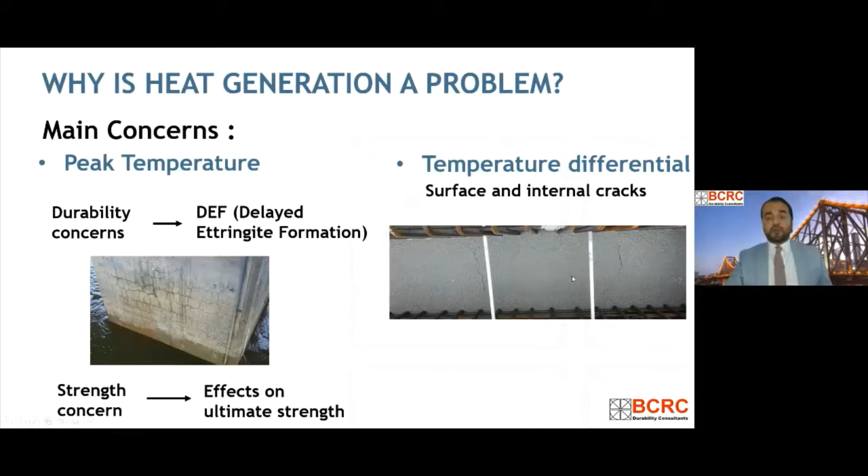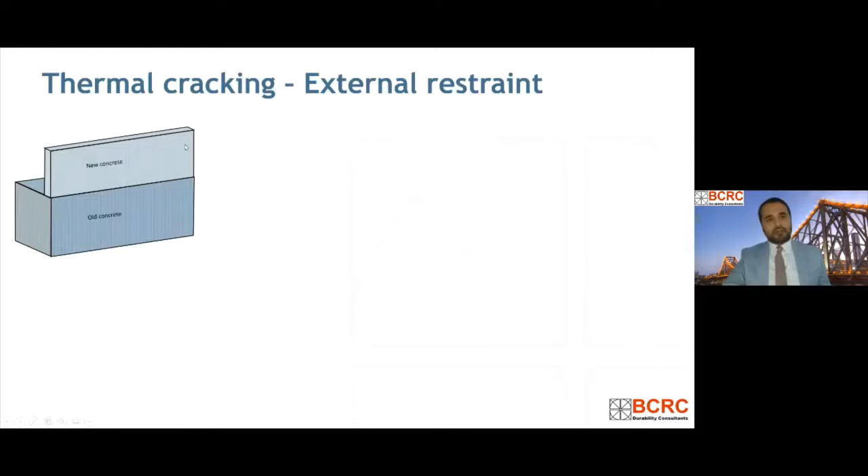Now all these thermal contractions and shrinkage are restrained by this old concrete, right? And the degree of restraint will depend on the size of both elements, and the type of concrete that we're using, the elastic moduli. So it develops tensile stresses in the new concrete, right? Our compressive stresses gradually change to tensile stresses, and as soon as they exceed the limited tensile strength capacity at early age, the cracking occurs. So this is the whole mechanism behind the external restraint cracking.

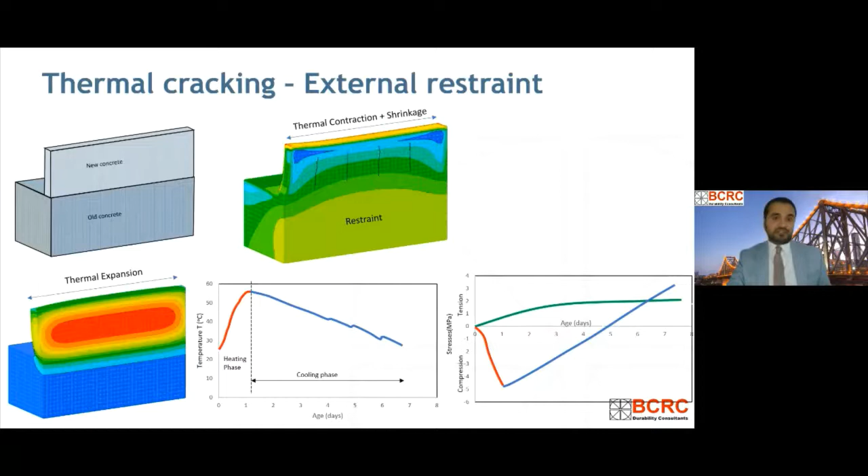Now in mass concrete elements, the main type of cracking that we observe is due to internal restraint, right? So what is an internal restraint? Internal restraint occurs due to temperature differential, as I said, because your inner core is too hot and the heat is dissipating from the surface, so you always get a gradient, right? So no matter if the concrete is insulated, you still have a gradient, and even if you remove the formwork, you will get a much steeper gradient at that time, right?

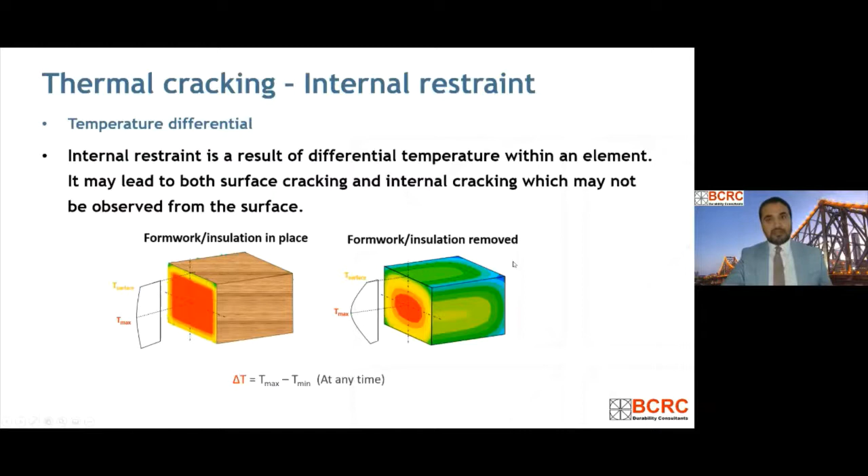So our temperature differential is basically the maximum temperature minus the minimum temperature at any stage during this process, right? It's not just when the formwork is in place. It can happen once you remove the formwork, so that temperature differential should be considered at any stage during this whole process, right? Now we know what the temperature differential is, so we can see how this internal restraint or temperature differential causes the cracking, right?

Whereas in the cooling stage, the core starts to cool down more rapidly compared to the surface, because the surface has already lost a lot of heat, right? So in this case, the tensile stresses start to develop inside the core, and then you have a risk of internal cracking as well, right? So at this stage, surface cracks may open, and also you can get some internal cracking which may not be visible from the surface. So this is what happens with the internal restraint.

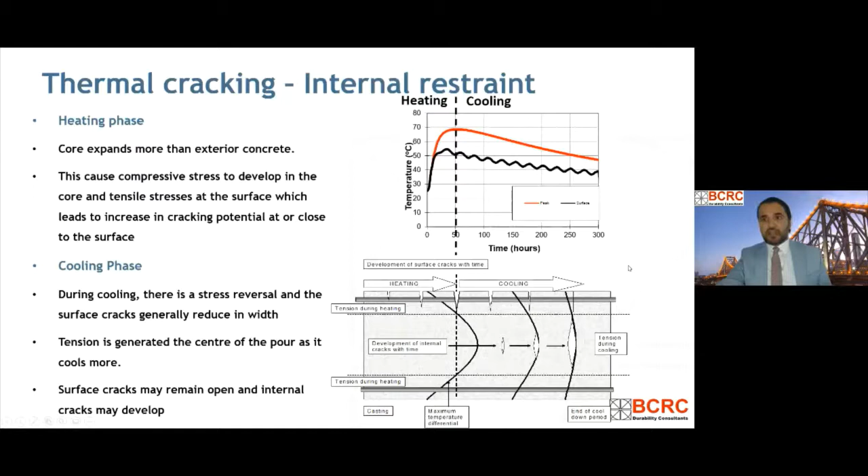Now to evaluate the risk of cracking due to internal restraint, we need to calculate the thermal strains, right? Thermal strain is normally calculated with a simple equation. You just multiply the coefficient of thermal expansion of concrete with the temperature differential you're getting. So it depends on two factors. You can see from the equation, the higher the coefficient of thermal expansion and the higher the temperature differential, the higher the cracking risk.

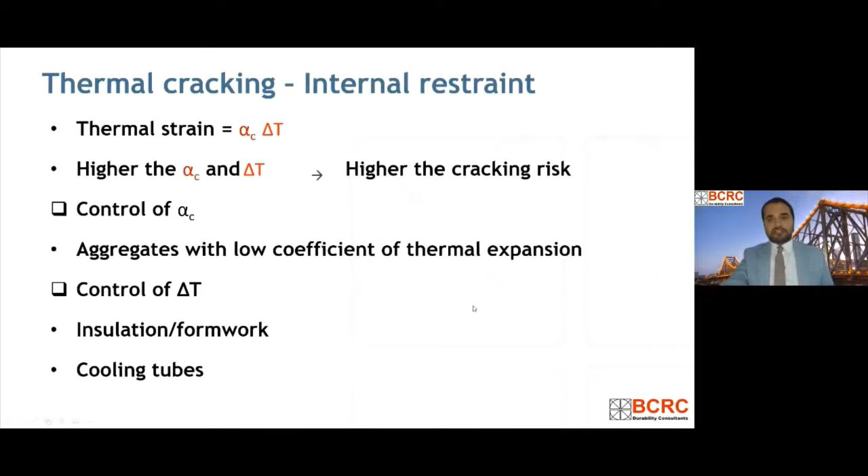So to eliminate the risk of cracking, we need to lower these two factors, right? We need to select the right type of aggregates which have a lower coefficient of thermal expansion, so we can get a lower coefficient of thermal expansion for the concrete. This is one way, and the other thing is we need to control the temperature differentials. Now, how to control the temperature differentials? We can do it in two ways. We can use insulation or formwork, or we can use cooling tubes, right? So let's have a look at this example on controlling the temperature differential by these two different methods.

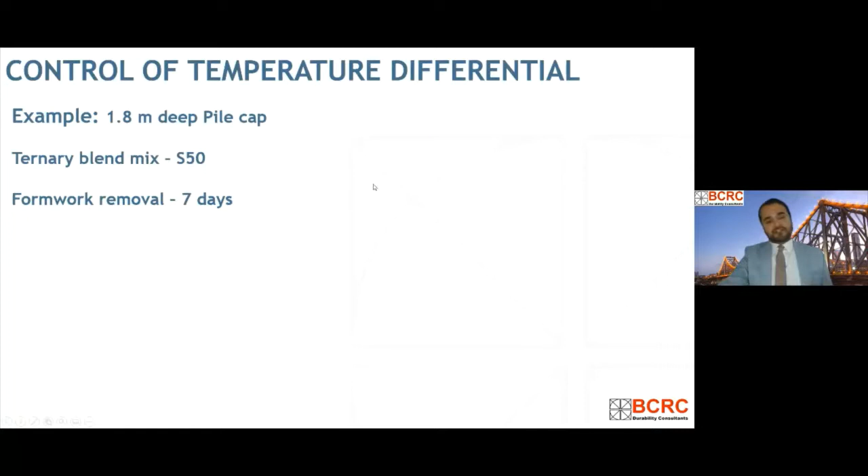But as soon as you remove the formwork, there is an abrupt change in the temperature differential. This is called thermal shock. So in this particular example, the temperature differential that we are looking at is much higher than the normally allowable limits, which are between 20 to 25 degrees. But in this case, we're looking at a temperature differential of 48 degrees, which means there is a serious risk of cracking, right?

Now to avoid that, because we're looking at the first case, we're using formwork and insulation to control this temperature. So we need to extend the period where the formwork or insulation are in place, right? We can extend that period and we can bring that temperature differential down within the allowable limit. In this particular case, we need to keep the formwork and insulation in place for 24 days, right? If you keep that in place for 24 days, you can get the temperature differential within the allowable limit, which is 25 degrees, right?

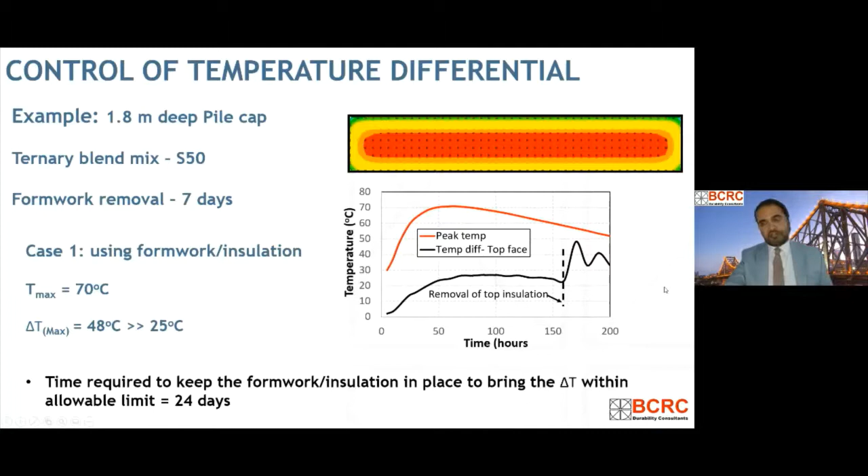So you can see that this technique takes a much longer time to control the temperature differential within the allowable limits. The much quicker technique is using the cooling tubes. Again, the same example, but this time we're going to model it using the cooling pipes, right?

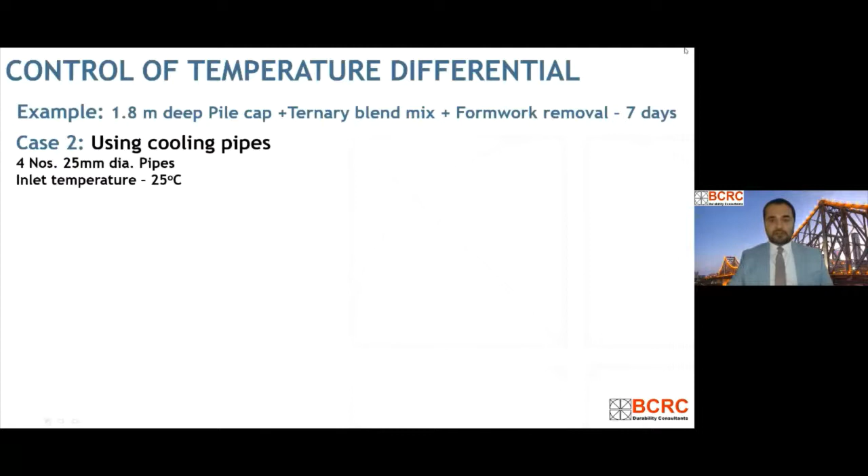So what we are doing, we're introducing 4 cooling pipes, 25 millimeter diameter, with an inlet temperature of 25 degrees, right? So this is the modeling outcome. You can see this is the cooling pipe going through the pilecap. This is the longitudinal section, and you have 4 of these running along the width.

So what happens then? Now we can see that we have significantly reduced the peak temperature, right? From 70 degrees in the previous example, we have reduced it to 60 degrees, right? Not only that, we have also reduced the temperature differential, right? So this is the formwork insulation removal time, which is 7 days that we considered in the previous example. But this time we're only looking at a temperature differential of 24 degrees, right? And a peak temperature of 60 degrees.

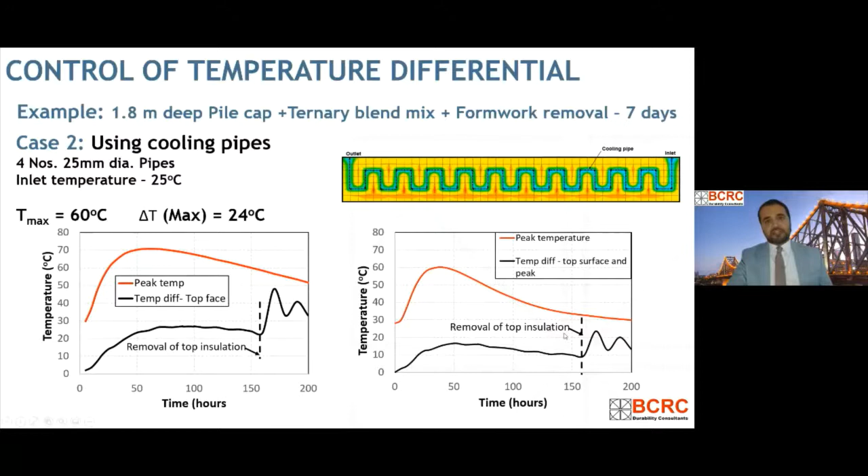So just to make a comparison with the previous example where we have done modeling without any cooling tubes, you can see that we have not only reduced the peak temperature, but we have also increased the rate of cooling in the cooling phase, which is very helpful in keeping the temperature differential within the allowable limits, right? Okay, so next let's move on to thermal modeling.

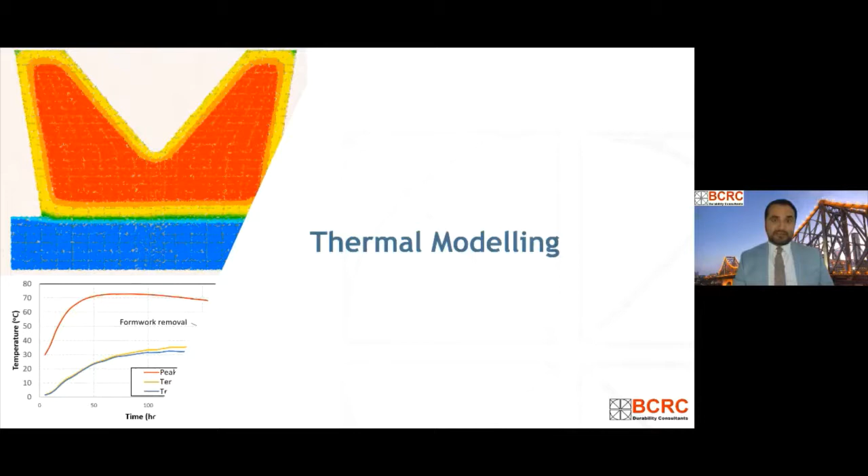Now thermal modeling is very important, because you need to predict the temperatures, you need to predict peak temperature, you need to predict the temperature differential to assess the risk of cracking, and it is very important to do it accurately, because the errors made at this stage can have significant consequences, right? So the first thing to know about thermal modeling is you need to basically know the adiabatic response of the concrete, right?

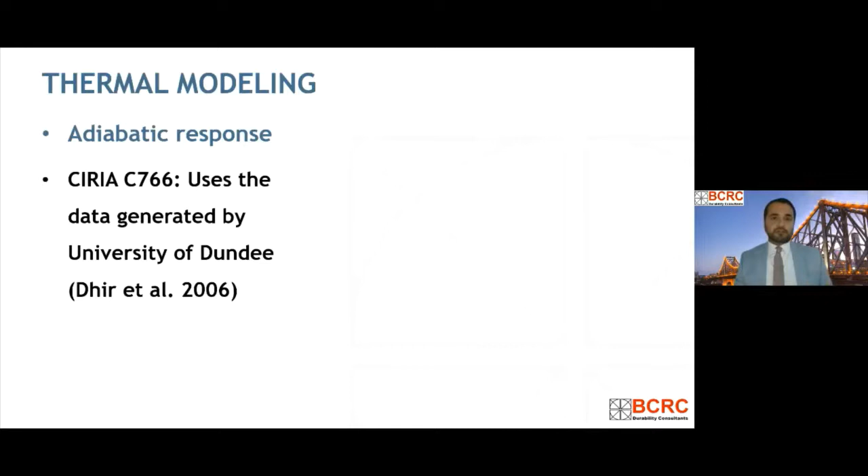So adiabatic response can be estimated using CIRIA C766 spreadsheets, right? So CIRIA C660 or C766, which is its update. They use the data which was generated at University of Dundee in 2006, right? So they have a set of data for each supplementary cementitious material and its type of cement. And then you can use that data to basically predict the adiabatic response. This is how a CIRIA C766 spreadsheet looks like.

So you put your binder content, whatever the binder content you have in your concrete mix. You put the binder type, whether it's 100% GP cement, whether it has some fly ash in it or it has slag in it. You put that binder type in it, and then you put the addition, like what percentage you're putting in it. And you can easily predict this graph, right, which is the adiabatic response.

But the issue is that it has certain limitations, right? This spreadsheet is based on the experiments which were performed in UK, and Australian cements are much different from the European cements, and the behavior can be different too, so you can estimate a wrong temperature. The other limitation that it has is that you can't use it for a triple blend concrete, right? You can see this option here, the binder type. You can only put one type, like either you can put fly ash in it or you can put slag.

But if you have a ternary blend where you have fly ash and slag together, you cannot use this spreadsheet unless you are very experienced and you know how to handle the situation, and you have seen the adiabatic response of these mixes before. You cannot straight away use this spreadsheet, right? So this is the main limitation.

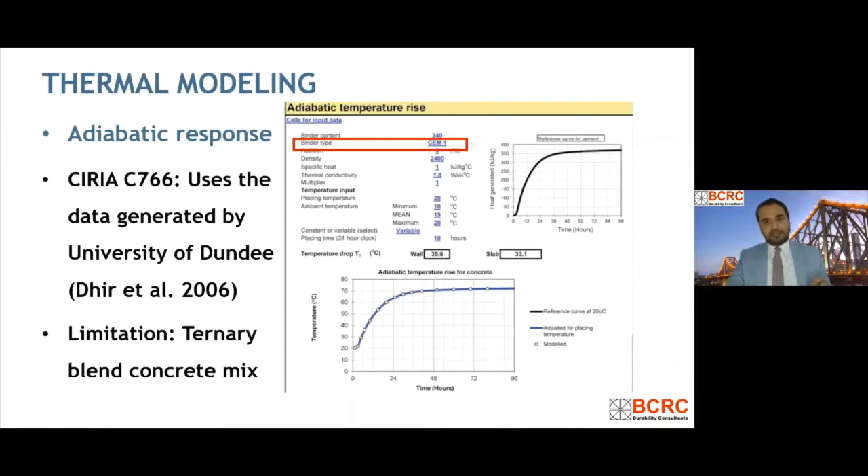So that's why the more accurate way to get the adiabatic response of a concrete mix is to perform a hot box trial, right? At BCRC we developed a two-probe method, which is given in CIA Z7/07. So it's a two-probe method. This is how the geometry of a hot box looks like. It's a 1 cubic meter concrete you basically need to pour. And the data that we get from this hot box test is very accurate.

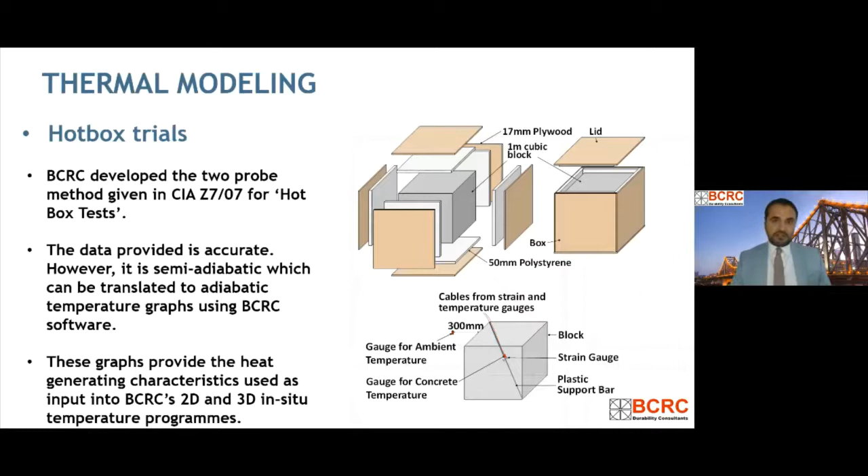However, it is a semi-adiabatic test, right? You have to keep that in mind. You cannot use that data simply in your modeling because this is a semi-adiabatic test, and you have to change this data to fully adiabatic, and we can do that at BCRC using our in-house software, which changes the semi-adiabatic data to adiabatic. And then once you get that adiabatic curve, you can generate the heat generating characteristics of the concrete, which can then be used in 2D or 3D modeling to predict the in-situ temperatures, right?

Now, for in-situ temperatures, there are two different techniques, right? The first one is the simplest one, using CIRIA C660 or CIRIA C766 spreadsheets. Everyone has got access to CIRIA C766 spreadsheets. It is based on 1D finite difference approximation, mainly used for simple structures, for slabs and walls. And because this method is easy to implement in a spreadsheet, it's very common, because everyone can use it, right?

But it has certain limitations, right? We discussed previously, you cannot use it for triple blend concrete, but apart from that, for in-situ temperature predictions, if you have a complex geometry, where you have varying thickness, varying depth, you cannot use these spreadsheets simply, or even if you have a staged construction where the concrete is poured in lifts, right?

For example, in dams, right? So you cannot predict the behavior of the lower lift due to the heat generation of the top lift using these spreadsheets. And also, when you're modeling cooling tubes, you cannot use these spreadsheets, right? So these spreadsheets have very basic application.

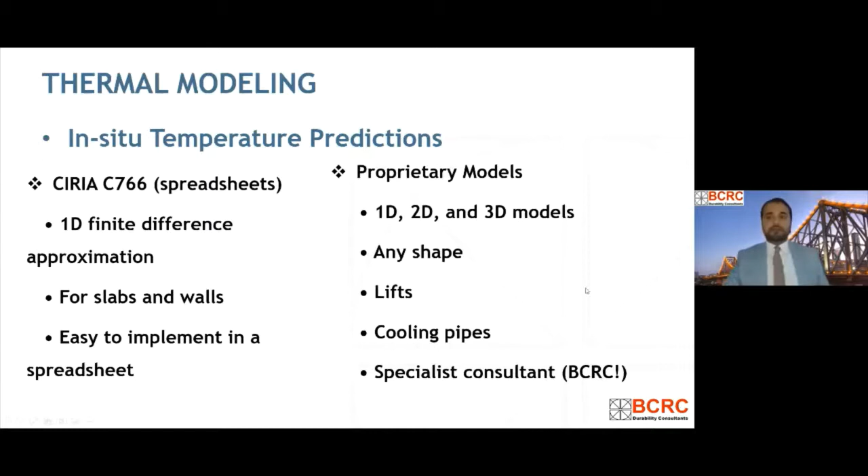Now, the other method, which is more robust, is using proprietary models, which can do 1D, 2D, or 3D modeling. You can model any shape, any geometry. You can model staged construction if you have a wall or a dam which is constructed in lifts, and you can model cooling pipes. But for that you need to have a specialist consultant like BCRC, right? At BCRC we have these proprietary models, and we can do all these sorts of things. I will give you some examples where we have used these techniques for different projects.

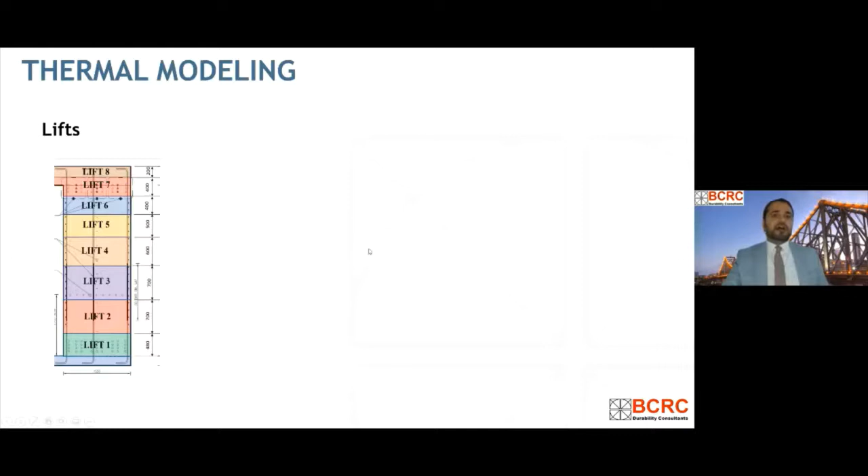So this is a staged construction example where the client has cast this massive wall in different lifts. So you can see the thickness of each lift. This is how we have modeled this wall, and this is the behavior of each lift, right? You can see here, for example, the first lift has gone to its peak, and then the temperature starts to decrease. And then as soon as you cast the second lift, you get another peak, yeah? You get another peak because of the top lift. This is due to heat of hydration of the top lift.

So you cannot model this response using simple spreadsheets, right? And this is very important in estimating the temperature differential to accurately predict the risk of cracking, right? This is the graph that we have generated using CIRIA C766, and you can see that you cannot predict the behavior of the first lift when the second lift is cast, right? So this is the main difference.

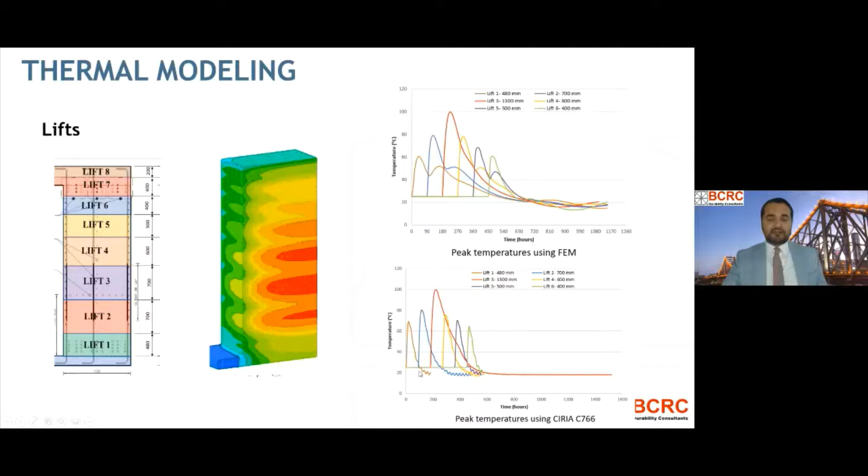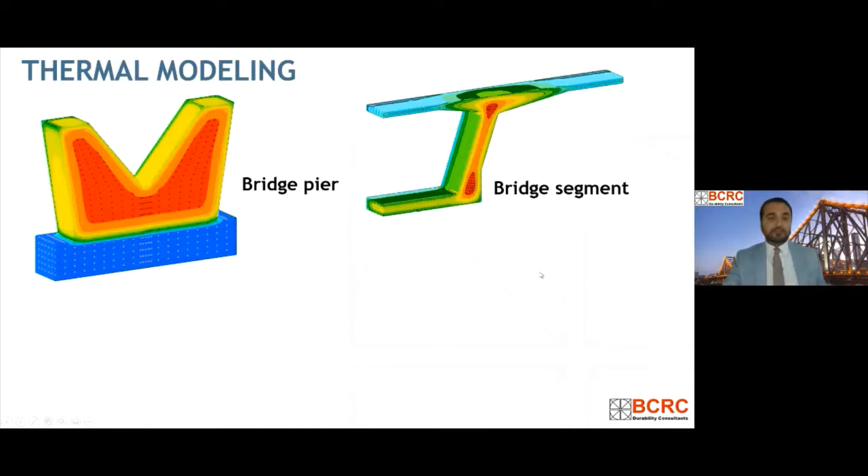Now the next is monitoring the in-situ temperatures. In-situ temperature monitoring is very important because it will give you a record of how the concrete is behaving. So you need to have hourly logging of temperatures and daily checking and downloading, which has become very easy nowadays with the latest technologies. So you need to have at least two probes in one placement, one at the maximum temperature location and one at the minimum temperature location.

When using cooling pipes, the maximum temperature will always occur in the largest area without cooling pipes. You need to install one in the middle of that area. And also logging is required where maturity is used as a means of assessing strength development and time for stripping with no further curing.

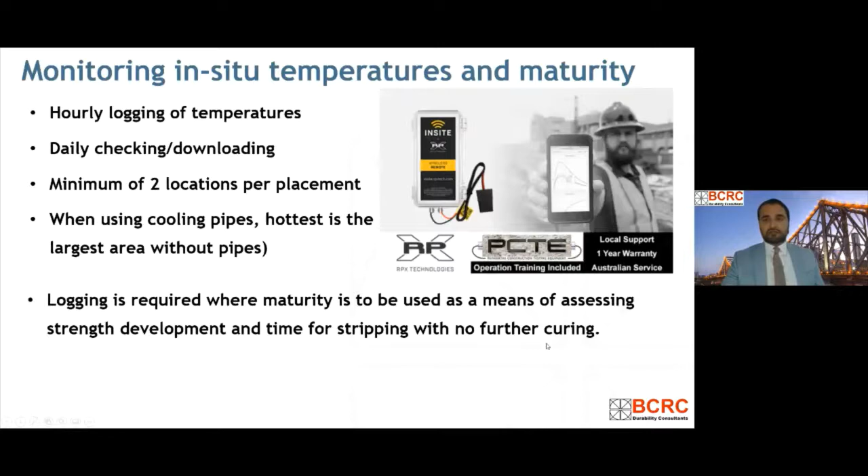So with the latest technologies, I was talking about that. For example, this Insite technology. This is a really amazing technology. I'll talk about some of its key features. Using their Insite system, the logging probes are turned on automatically, right? So you don't need to wait and look for the concrete to turn it on. A BCRC engineer can install it well before the pour, and as soon as it comes into contact with the concrete, it turns on automatically. These probes also log the data, so you don't need to install a separate data logger.

And once your concreting is done, which is a risky process where you can damage your data loggers, you can attach a single channel or 4-channel logger to this probe, and then the data can be transmitted directly to the cloud in real time, and BCRC can monitor and advise the contractor on the outcome, when the maturity is achieved, and when to strip the formwork. And also, the contractor can get alarms directly in their email. For example, if you have set a temperature limit of 70 degrees, and if somehow it has been exceeded, the contractor will get an alarm in their email, right?

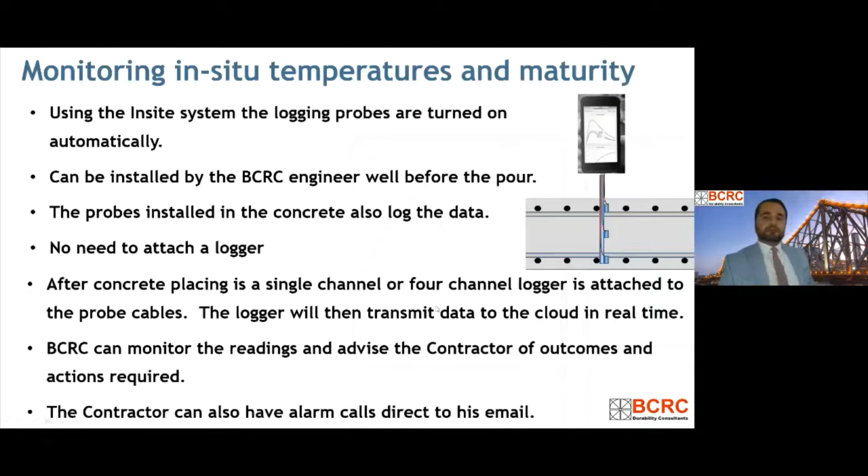And same with the maturity. If you have achieved a certain level of maturity, you will get an alarm notification, and then you can strip the formwork. So to end my presentation, I would like to conclude how BCRC can help you in

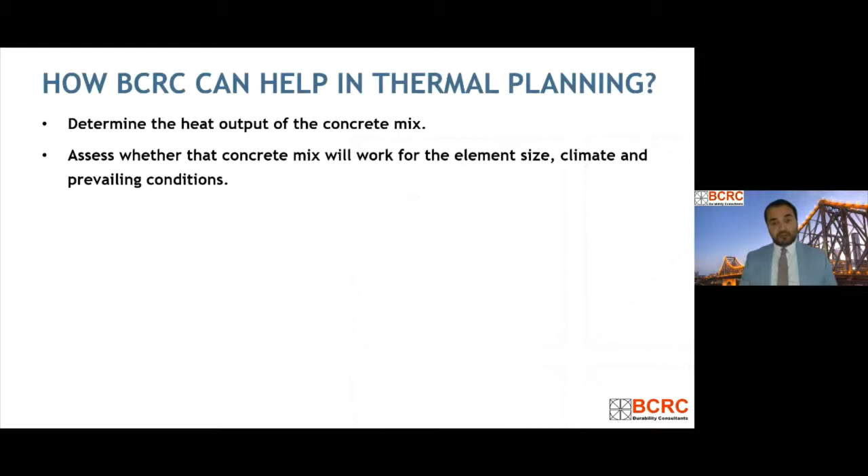thermal planning. We can determine the heat output of a concrete mix, whether it is suitable for that particular element size, climate, and prevailing conditions. We can modify the concrete mix. We can advise on appropriate replacement of SCMs. We can alert the contractor or concrete supplier to treat the concrete as something out of the ordinary, if it is required.

And also, we can inform the ready-mix concrete supplier about the maximum temperature of concrete at placement for that particular member or element. Tell the contractor how to keep the temperature differential between the core and the nearest surface within the specified limit, and how to lower the risk of cracking.

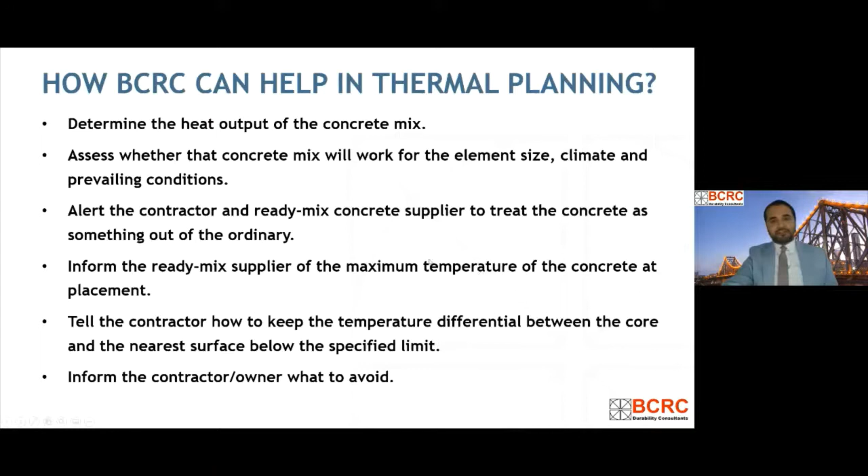Inform the contractor on what to avoid, for example, the pour sequencing. We can help the contractor with the pour sequencing, so we should be avoiding any end restraint and unnecessary restraint that could occur with poor concrete pour planning. So with that, I conclude my presentation, and thank you so much for your attention.

Okay. Well, thank you, Inam. Very interesting presentation. I'm sure you will all agree. So we have a few questions here from people in the audience. We might just go through a few of those as we have a little bit of time spare before we need to move on to the next talk. I don't think I will tell people's names who have asked the questions. I'll just read the questions out anonymously.

So, Inam, the first question is, thank you for your presentation. Would the internal cracks normally go unnoticed in practice? And is there the same effect on durability as for external cracks?

Yeah, good question. So yes, the internal cracks most of the time remain unnoticed, and they don't have a lot of consequence on durability unless the element is restrained. So if, for example, you have an end restrained element, and you're getting an internal crack, then that could eventually come to the surface, and you can see that crack. So you need to avoid internal cracking if it is an end restrained element. But most of the time they remain unnoticed.